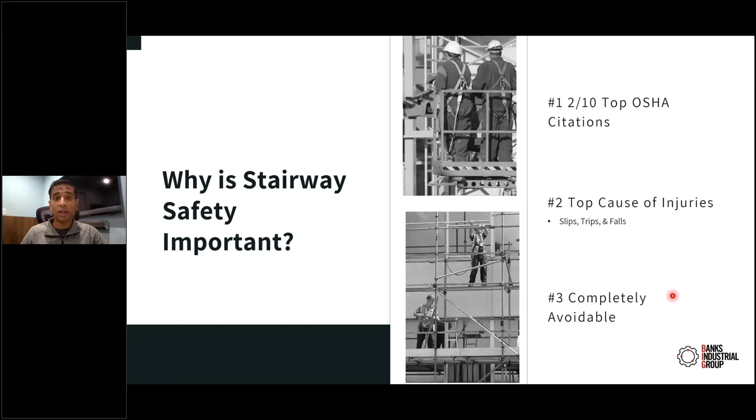So the first thing we want to talk about is, what are the differences? What are the different types of platforms or stairway accesses you'll see on the market? There are really two of them: IBC and OSHA. It's important to understand that IBC applications are more for commercial environments, while OSHA applications are more for industrial environments. This is why it's important.

When you have a commercial environment, you're looking at an application where you might actually see children involved, or older folks visiting these areas. When you have an OSHA compliant setup, you're looking at, say, an oil refinery, a chemical plant, or a warehouse, where you should not have those types of people—very young children—in those areas.

So when you look at the differences, the first thing that stands out is the number of balusters on an IBC compliant staircase versus OSHA. Why? Because anybody with kids knows they'll just run off and do what they want, and the first thing they'll try is to climb through. So the IBC compliant staircase says, no, we're not going to allow that to happen.

Second, you have two levels of handrails that stand out right away, and the handrail extends well beyond the bottom step. That way, once both feet are secure on the ground, you're still holding onto a handrail. On the OSHA compliant version, you won't have that—because you're not worried about children holding a handrail, you're really looking at working age adults utilizing the platform.

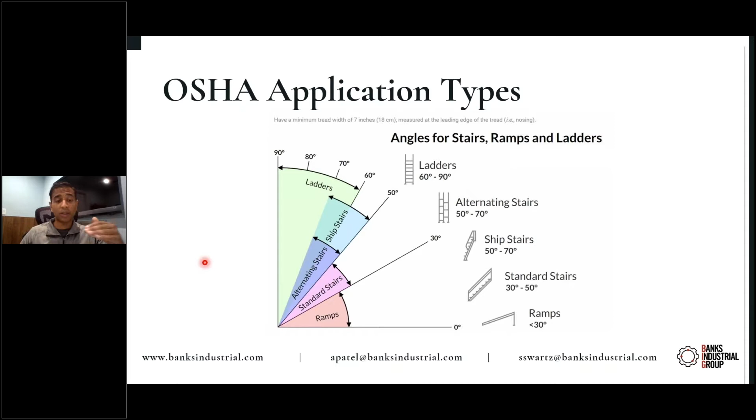They're not going to really vary that much. However, with OSHA compliant systems, even though in this picture it's very similar to the IBC, OSHA allows you to go from 0 to 90 degrees. So if you need to put in a system, whether it's a ramp, standard stairs, ship stairs, or all the way up to ladders, OSHA allows you to utilize all of those degrees to access from one level to another.

So let's talk about the different application types that are out there. First, platforms. What do we use platforms for? To access equipment that might be at a higher level than we're currently at. And what don't we want to do? We don't want to constantly build scaffold systems to help us access equipment we work on frequently. We also don't want to bring a ladder, lean it against the equipment, climb up it, and work that way. Why? It's not safe. There's a safer way to do it.

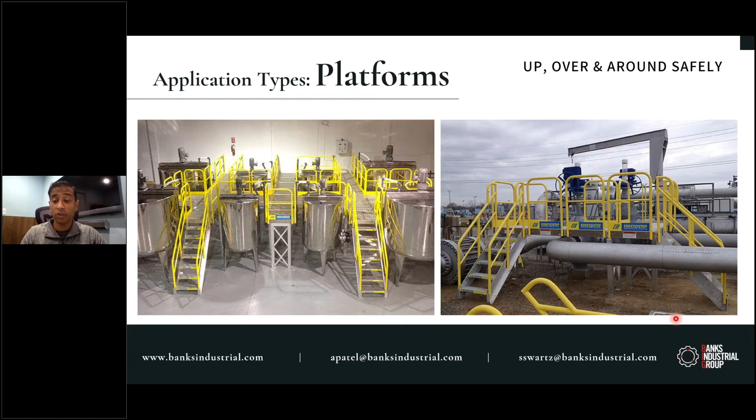Platforms are a great application. In this application, you can see we have multiple vats and some motors. An electrician needs to get up to those motors, so they simply climb up the steps and know they're working safely. In this second example, we've got some mechanical valves, looks like some control valves. The mechanics can climb up, bring their equipment with them, set it down on the platform, and get right to work.

Modular, portable modules, and then also ladder applications. With portable modules, oftentimes they're really not portable - these modules get set and become permanent. They don't come with stair access or platform access. One of the things you want to avoid is bringing in a ladder to open up a panel. You don't want to work that way. What you want to do is set up a permanent structure right next to it that's customizable to fit the length and allow you to access all the different doors and work.

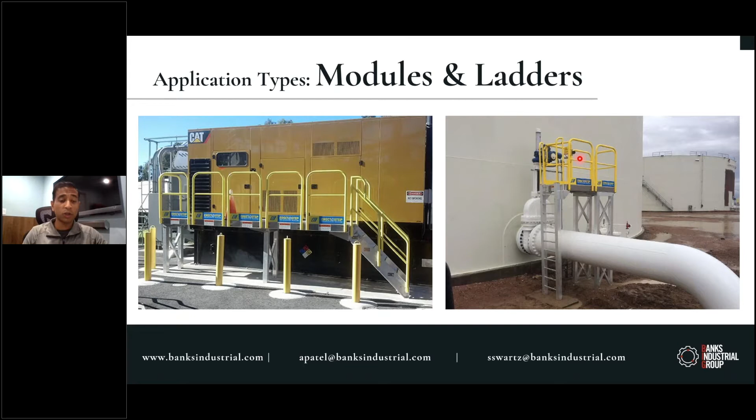With a ladder system, which is basically a stair that goes straight up and down, it allows you to access equipment that might be at a higher level in a tighter or small space, or maybe where a stair isn't going to work.

Crossovers and walkways - we see a lot of crossovers when it comes to commercial buildings. Where do we see them? On the roof. Why? Because roofs of commercial buildings have a lot going on, whether it's a knee wall, ductwork, piping, or conduit. You don't want people climbing over this equipment or stepping on it. So what do you want to do? Put in a good OSHA engineered crossover system in those applications.

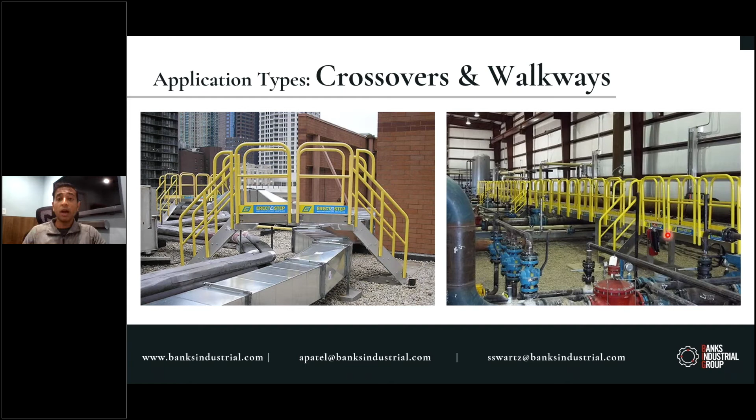Walkways - think about aisles. You want to get up in one aisle, over equipment, and down another aisle. Think about an industrial setting, maybe a wastewater treatment plant with a lot of piping, or a manufacturing or warehousing facility with conveyor belts where you want to get up over and around them.

This is actually a really important topic, and I want to ask a quick question to everybody: how many of these do you see in your facility on a daily basis? The reason I ask is I've spent quite a few years in the industrial setting.

I was in oil refineries pretty much most of my career, and I can't tell you the number of times I've been asked to climb up a ladder, then at the top unhook a chain, get in there, and get on the other side of it. The number of times I've physically stood on top, looked down, and thought this little chain is going to be the only thing between me and not going home that day. They are one of those applications where there's a lot of, let's just say, nervousness in being around them.

So this is something OSHA is really starting to crack down on, and it's important for you to know, because when they come in now, and I talked about the citations earlier, this is one of the main things they're looking for.

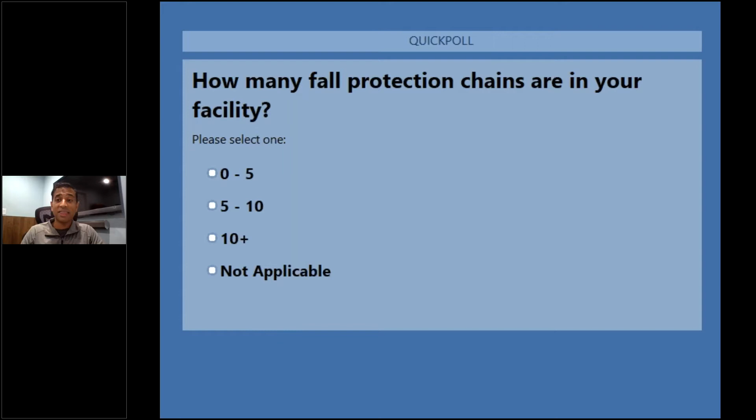When they're looking at these chains and they see you've got one of these, that's up to $10,000 per application. Every time they see that, they could see 10 of these, that's $100,000. So this is just a very important topic.

I just got some results of that poll. 33% of you out there have at least 10 of these in your facility. Well, for every one of them, you've got to think about $10,000.

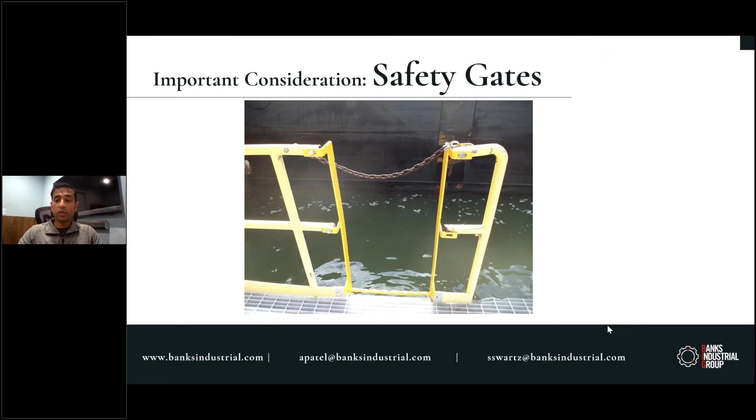So what's the quick answer here? What can we do to help you with that? We've got a great product known as the Yellow Gate. It's 100% OSHA approved, comes with a 200-pound point load, and reinforced load protection within the spring itself. The Yellow Gate is completely universal mounting, so you can put it on almost any application. It extends from 16 inches to 36 inches.

I can't talk about safety on crossovers and ladder systems without bringing this up, so I wanted to share it with everybody. Putting one of these in is a lot less than the $10,000 fine for each gate that you'll end up seeing from OSHA if they come in for an inspection.

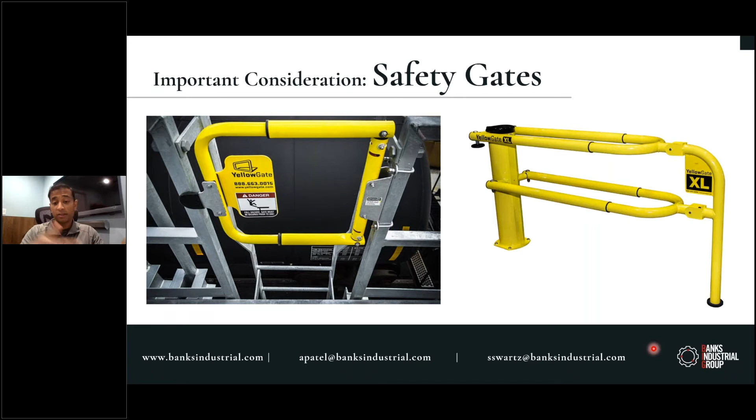And in the case that you've got large equipment that needs to go in and out of your facility, we actually have a Yellow Gate for that too. It's not meant to stop your tractors or whatever from falling into something, it's meant to allow them to come in and out as necessary.

So let's get a little deeper into the solution for crossovers that we have, known as the ErectaStep solution. It's a pre-engineered, 100% OSHA compliant product that comes in 5 main parts: a 3x3 platform, a handrail that can be fixed or removed, a stair system with between 1 and 6 steps, a platform support tower structure, and a ladder that can also incrementally go up just like the steps. As a side note, this platform support can also be adjusted in height depending how tall you go.

Really, what can you do with this? Really anything you can imagine, any application you might have. As long as we have good dimensions, we're able to configure any number of these components as necessary, as you'll see in some of the other pictures in a little bit. It's very easy to work with.

We have a special program where if we know roughly what you're trying to achieve, we can get you engineered drawings rather quickly. We have the materials that we could turn around pretty quickly as well. Distance is not a problem.

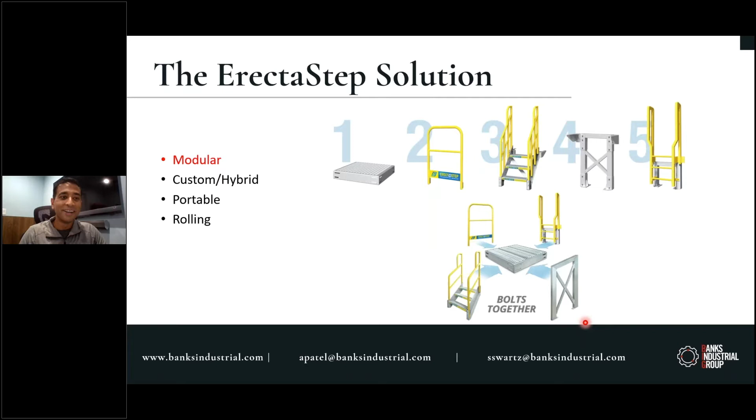In fact, we have a project we're going to show you. It was in the U.S. Virgin Islands, and we actually helped put together several platform systems. It was very ideal because we could ship it down there. What was not ideal was that we weren't able to go down there, but our benefit is that we don't actually have to always be there. So that was a really good application to learn about.

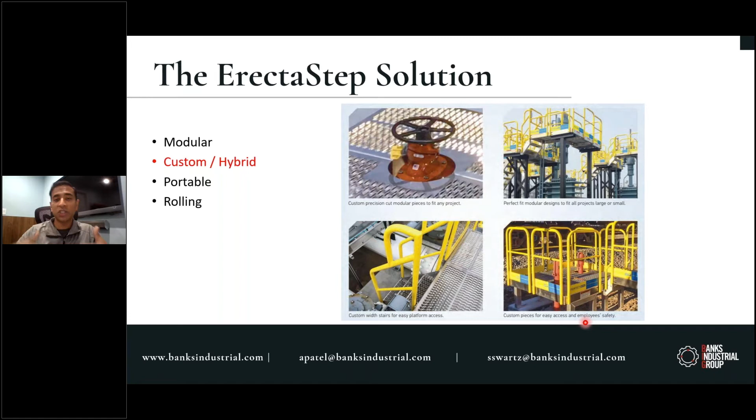But what happens when things aren't exactly the way they are, because that pretty much always happens whenever you're in a work environment? You might have a valve that sticks out where your platform needs to be, you might need wider steps than our standard, or maybe the entire design needs to sit higher than it's rated for. We can actually work around that and provide a custom hybrid solution as well.

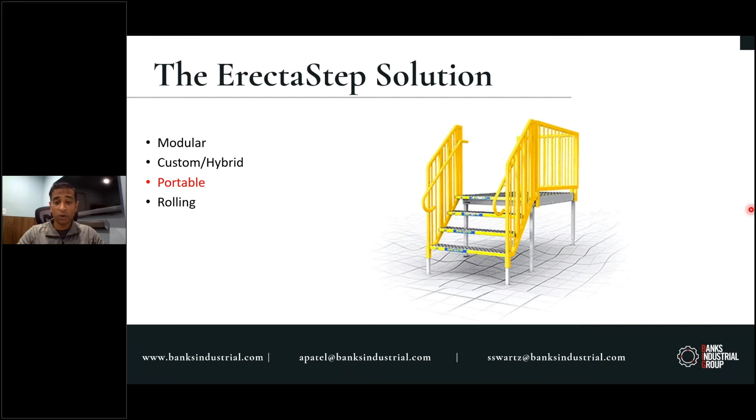We also have portable systems, IBC and OSHA compliant. If you've got a portable office building or a trailer, and you need to pull up next to it with a stair system that needs to follow along, and you're always working with uneven ground, we have a great solution for that.

And finally, I'm sure you've seen these either at Home Depot or Lowe's, where you've got the rolling ladder. You can roll it, get up top of it, it's got a little working platform, grab whatever you need, come on down, and move it out of the way.

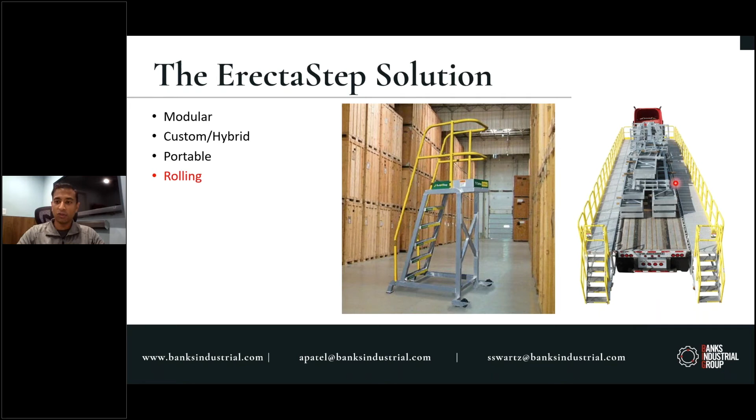And then a really unique application are these tractor trailers where you have a huge flatbed of equipment. You've got to pull away the stairs, and usually you build some scaffold there, but in this case you can keep one system, you can roll it in and out. It has these removable handrails if you need to offload things from the side.

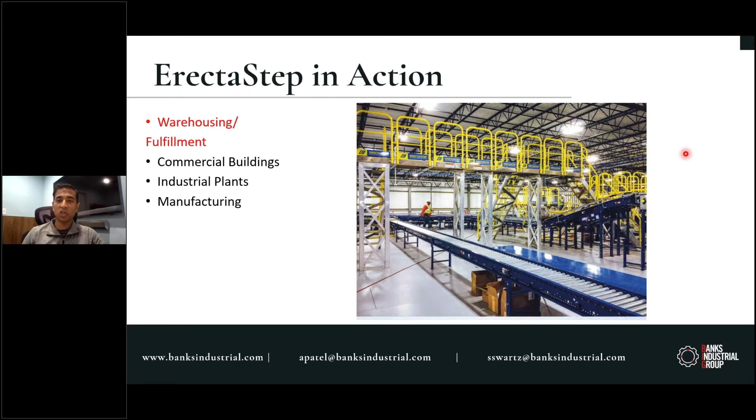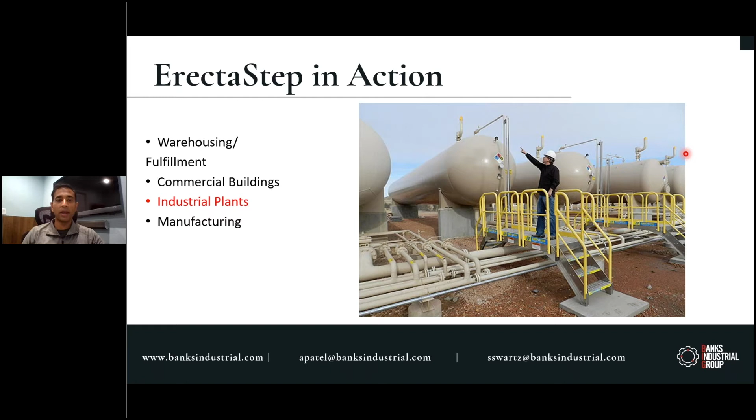So different areas where we've used the ErectaStep: warehousing, fulfillment centers, oftentimes with conveyor belts, commercial buildings, crossover systems on the roof, industrial plants like refineries and chemical plants, and manufacturing facilities. We can help you get up and access different equipment. When you have conveyor belts, similar to warehousing and fulfillment, you need to get up, over, and around safely in a robust and safe manner.

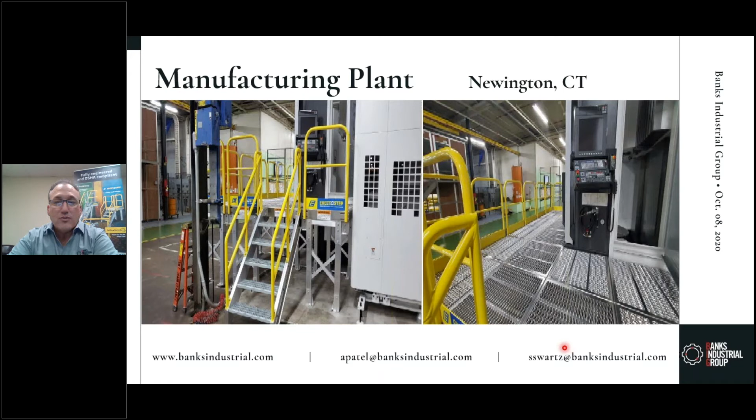This particular stair was wider than the conventional modular system, so we designed it to their specifications, and it mounted right to the standard platform system. This customer appreciated the ease of assembly and also the fact that they were able to save on engineering and design time.

Here we have a rooftop solar project in Bellmawr, New Jersey. We were contacted by an electrical contractor who was tasked with putting all these components on the roof, including cable trays that needed to get up and over safely. So we furnished them a two-step, two-platform system here on the left, and on the right, a two-step, one-platform system.

For this customer, they most appreciated the modularity of the system, the fact that they were able to take each component individually up a stair and erect it in place, assemble it in place. They also appreciated the aesthetics of the unit and how it flowed with the rest of the components already on the roof.

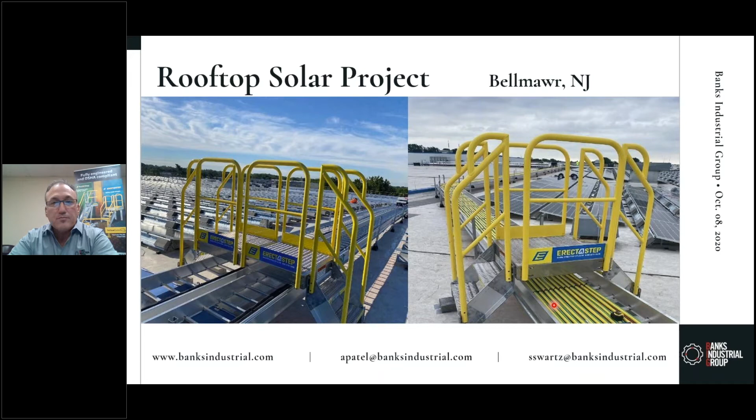Here we have an oil refinery upgrade in the U.S. Virgin Islands. This is the job that AJ had spoken of. We engaged our engineering partner regarding a problem their client had. Basically, on the left-hand side here, we have these wooden platforms that were not in compliance. They were degrading and just weren't safe. As this oil refinery got upgraded and back online, they needed to look at the safety areas and areas of egress.

Initially, the customer wanted to just have a local fabricator fabricate the platforms that they needed, but the concern was that there were going to be so many of these platforms needed in such a short period of time.

It was very important that the systems were corrosion resistant, obviously due to the fact that they're surrounded by salt water. So they gave us the opportunity to build the first one, the supply, and for them to assemble it. As you can see here, this is the system.

It's comprised of standard components. We have some half rails here. What you can't see underneath is we actually designed a universal offset tower support to navigate some of the piping systems underneath the platform, as well as some knee braces for platforms that were unsupported.

I'm happy to say that the customer was very happy with the outcome. They felt very comfortable with the assembly. Actually, it went a lot smoother than we even anticipated, not being there. And it looks like they're going to commit to many of these platforms over the next year.

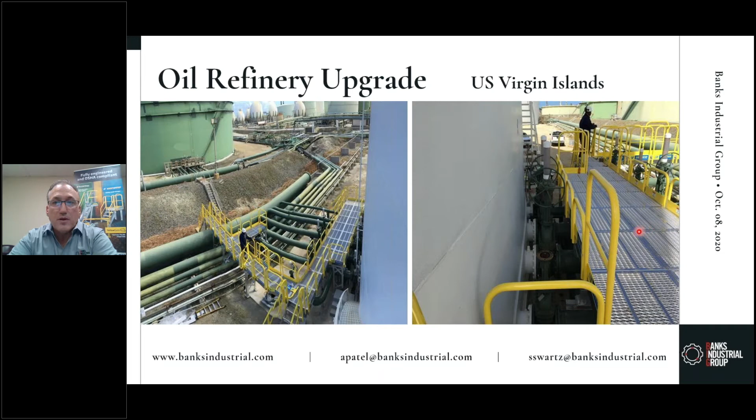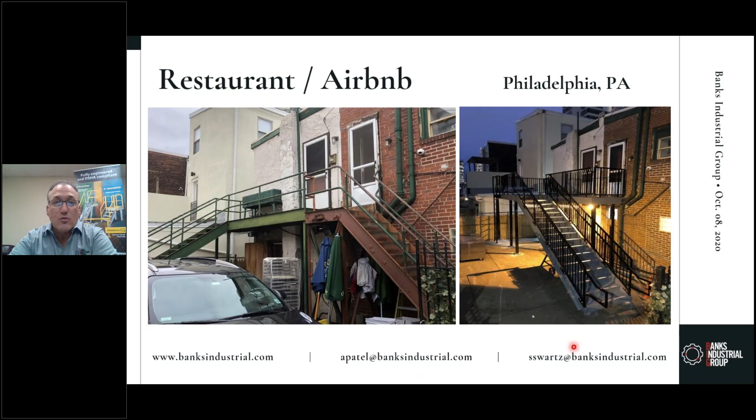Here we have a pharmaceutical plant in Conshohocken, PA. We were engaged by another one of our engineering partners to solve a problem for one of their clients.

As you can see on the left-hand side here, this is the original step system. It was made of Trex, supported by wood. And the major issue was this - you see this tape, all this non-skid tape. Well, that was their Band-Aids they put on these, because they had folks just continue to slip and fall when it would get wet, or if it even snowed.

So what we did was we basically came up with a similar design, but out of powder-coated steel. And the major change here was the perforated stair tread. So basically, we went with the same perforations that we have on the modular system. This is in the Northeast, so if it's going to snow, it's going to rain a lot. So it's important that all that precipitation weeps through these holes and it doesn't puddle up. In addition, we also bolstered the support structure as well, which they ended up just covering up with rocks. They really liked the finish, the powder-coated finish, and the fact that it met all the IBC compliances.

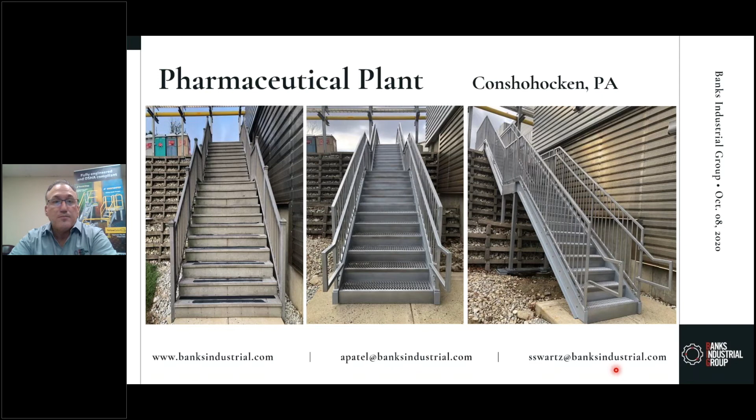Here we have a yacht and racing club in Pensacola, Florida. Like the last two slides, this is an IBC compliant commercial series, but this is what we would consider our readily available stock series. So as you can see here, the customer needed to get from the ground level to the second level, which was their offices.

They were using stacked containers here. Now these stock commercial series, they come in 2-foot increments. So as you can see, what the customer did, they were able to get something that was basically within stock. Only you're talking about 5 weeks complete lead time, and they just bolstered the height to meet the top of platform height by a foot, and they were still able to maintain the first riser compliance. This customer loved the fact that they could put it together themselves, so much so that they ordered a few more of these for another location in New England.

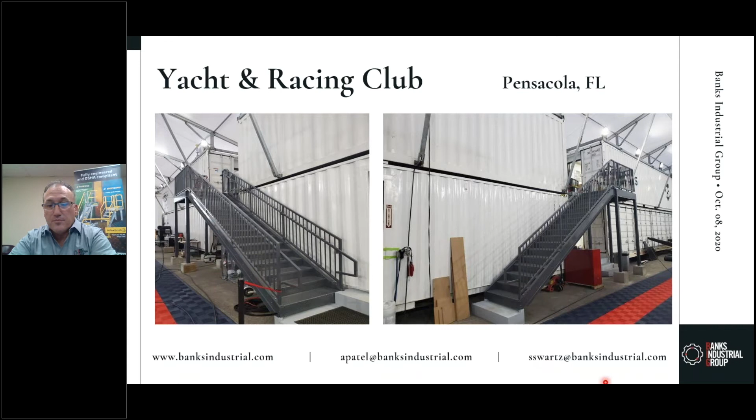Here we have a gas-powered steam plant in Jessup, PA. We were contacted by a mechanical contractor who was tasked with changing out all the safety gates and chains. As AJ had mentioned earlier, this is a major compliance issue that's finable. So if you see here the yellow gate, the reason why they picked the yellow gate is for obvious reasons - the fact that it goes from 16 inches to 36 inches.

And it's basically one stop, a one-shop stop for them. They purchased one yellow gate and they could fit in any opening. This particular opening is probably open to around 30 inches, but there are some smaller openings and some wider openings. In addition to the opening universal aspect of it, it also has the universal mounting system. It allows us to mount to a flat wall, to a round tube, or to a square tubing.

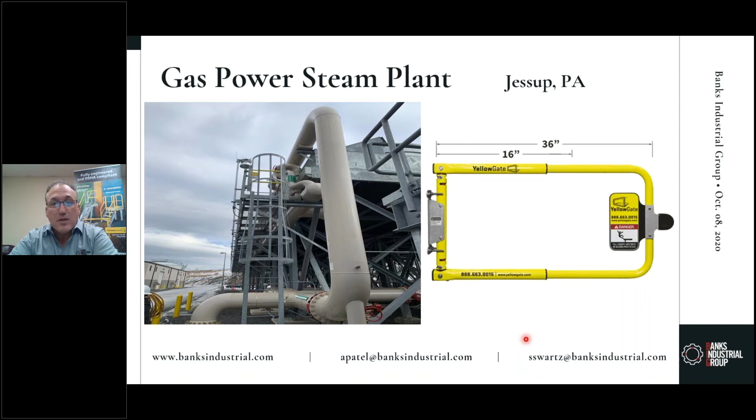The customer for this particular job, they ordered over 50 of these at one time, and I was just contacted by them. They're looking for 15 or 20 more over the next week.

Now the customer appreciated two aspects of the yellow gate. One was the ease of installation, but also for their client, was the ease of operation. You look at these yellow gates, they look heavy and cumbersome. They're really not - one person with one hand can raise and lower it very easily.

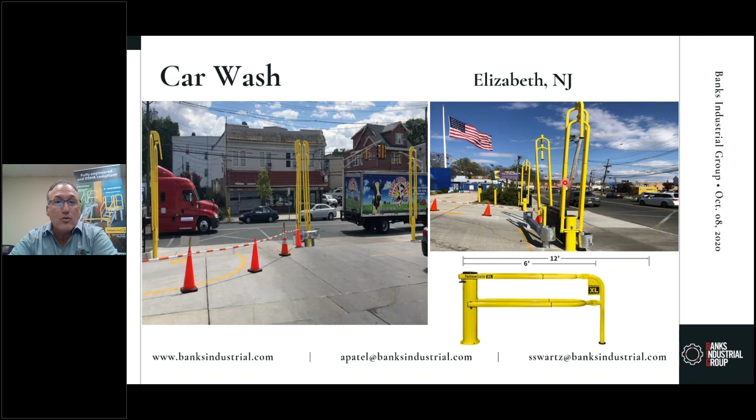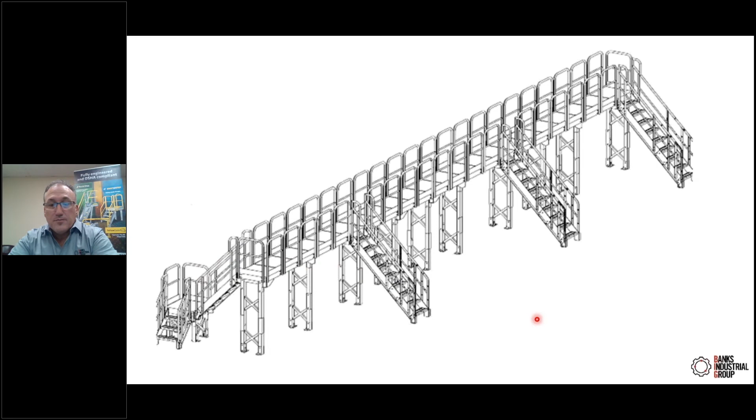Now this gives you a good picture of the system in place as we designed it. I want to add that this happened during the holiday period, so anybody that's ordering from these fulfillment centers knows that they're very busy. They can't really deal with any kind of downtime - they're already behind on shipping times and whatnot. So we were able to execute this during a very, very busy period for them.

And if you see the conveyor system here, this conveyor actually retracts and it advances into the truck. When it's fully advanced, it's very hard to get up, over, and around this safely.

So not only were they having issues with getting over the conveyors, but also just moving employees at break time or throughout the day efficiently. So we were able to supply three 90-foot sections.

This shows you the stair and the tower. While we were on site, there were a few changes that needed to be made that the client was unaware of until we showed up and started putting it together. Luckily, because we typically bring extra components, we were able to work around those obstructions without halting progress or even having to order parts in.

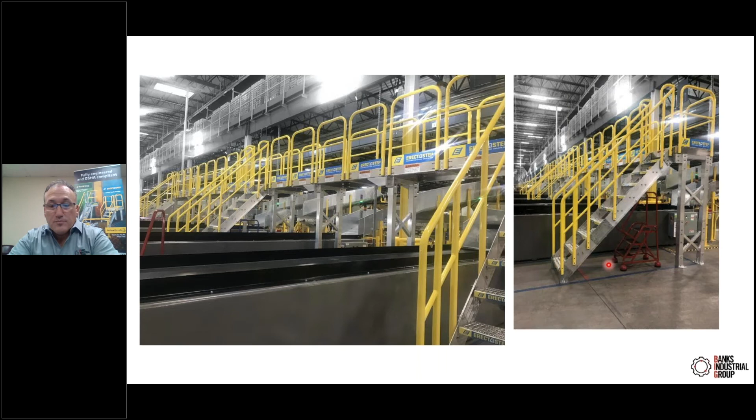Basically, it took 42 days from the initial inquiry for us to execute this project. But half of that time, 21 days, was waiting on their PO, and 5 days of total installation time.

Now, I might add also that this happened during a blizzard, a snowstorm. We actually used that to our advantage because the fact that they didn't have employees around the work area, we were able to hunker down and really get this done efficiently. The customer was ecstatic that we were able to get them up much quicker than anticipated. Since that time, we've engaged this customer at numerous locations for some platforms and crossovers.